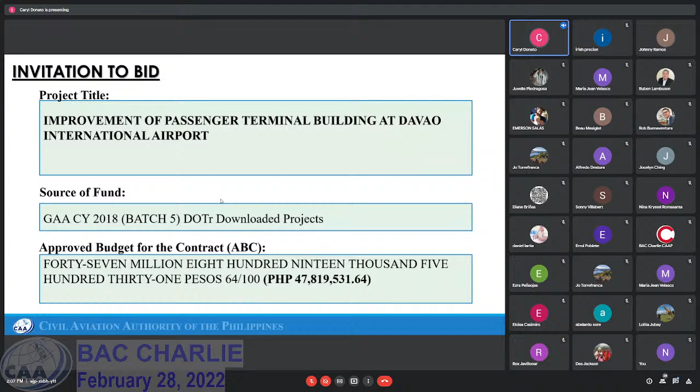For the invitation to bid, the complete title for the project is Improvement of Passenger Terminal Building at Davao International Airport, with the source of fund from the DOTR downloaded projects under GAA CY 2018 Batch 5, with the approved budget for the contract of 47,819,531 pesos and 64 centavos.

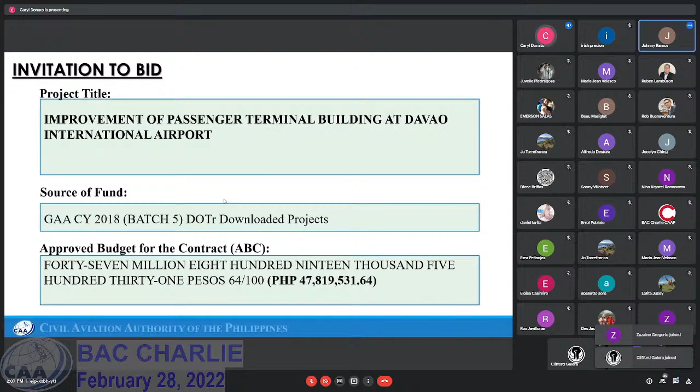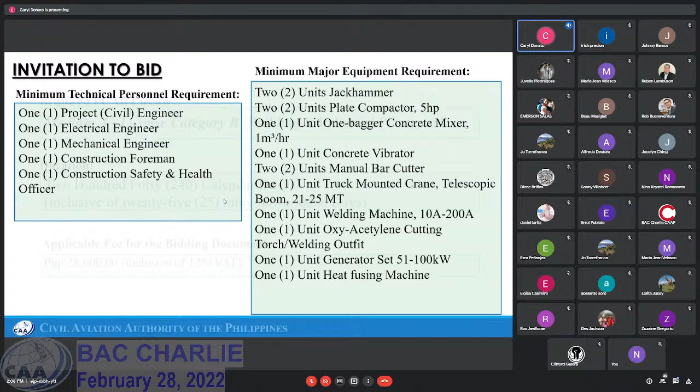Next is the required PCAB license. The prospective bidders must possess a PCAB license of medium A, license category B, for building and industrial plant, and also for the duration of the project. The project has a duration of 240 calendar days, inclusive of 25 rainy unworkable days.

And for the bidding documents, which the bidders can avail at the BAC Secretariat with the applicable fee of 28,000 pesos, inclusive of 12% VAT.

For the bid data sheet, for ITB Clause 3.0, Certificate of Site Inspection, duly signed by Engineer Rex A. Obsena, Airport Manager of Davao International Airport, or his authorized representative, is required to be submitted.

The Certificate of Site Inspection shall include the following documents as attachment: first, a copy of the company ID of the person who conducted the site inspection; a copy of the airport or facility visitor's logbook with the entry of the name and signature of the person who conducted the site inspection; and a picture of the proposed site, including the personnel who conducted the site inspection, together with the airport manager or his authorized representative. Bids not complying with the above instruction shall be disqualified.

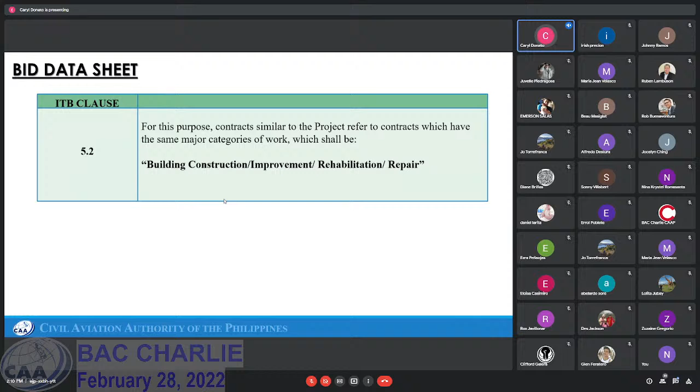For ITB clause 7.1, subcontracting is not allowed. And for 10.2, bidders shall submit all eligibility and technical documents as specified in Section 10, for the checklist of technical and financial documents. This will be discussed later on.

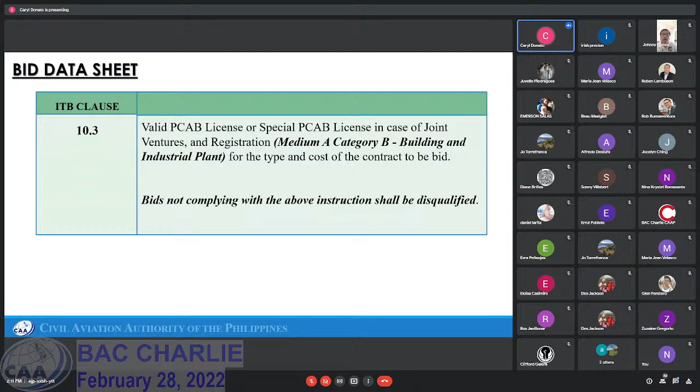And for ITB clause 10.3, valid PCAB license or special PCAB license in case of joint ventures and registration for medium A category B for building and industrial plant for the type and cost of the contract to be bid. Bids not complying with the above instructions shall be disqualified.

For ITB clause 10.4, the key personnel must meet the required minimum years of experience set below. For key personnel, we have project civil engineer, electrical engineer, mechanical engineer, construction foreman, construction safety and health officer, with a general experience of 5 years in general engineering and a relevant experience of 3 years in building construction, improvement, rehabilitation, repair, concreting of roads or other horizontal structures. Bids not complying with the above instructions shall be disqualified.

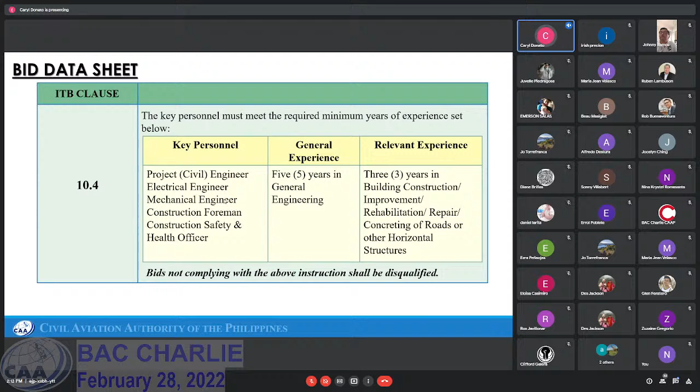For ITB Clause 10.5, the minimum major equipment requirements shown on your screen. Bids not complying with the above instruction shall be disqualified.

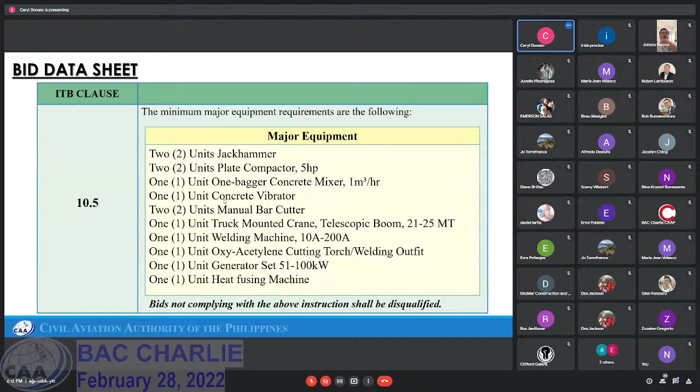For ITB Clause 11.2, bid exceeding the approved budget of the contract for the project shall be disqualified.

For ITB Clause 15.1, the bid security shall be in the form of a bid securing declaration or any of the following forms and amounts. The amount of not less than 2% of the ABC if bid security is in cash, cashier's or manager's check, bank draft, guarantee, or irrevocable letter of credit. The amount of not less than 5% of the ABC if bid security is in surety bond.

For ITB Clause 16.0, each and every page thereof shall be initialed, signed by the duly authorized representative or representatives of the bidder.

Submitted eligibility, technical and financial documents shall be properly marked with index tabs or ear tab and must be sequentially paginated in accurate order in the form, for example, page 3 of 100, page number of last page of the document per envelope basis. Pagination should be sequential based on the entire span of the whole documents inside the envelope. Bids not complying with the above instructions shall be disqualified.

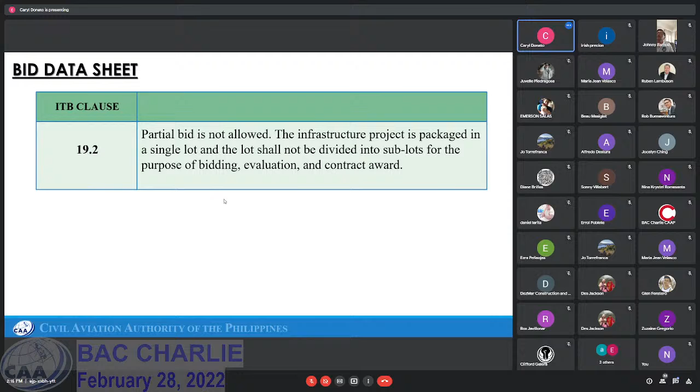For ITB Clause 19.2, partial bid is not allowed. The infrastructure project is packaged in a single lot and the lots shall not be divided in sublots for the purpose of bidding, evaluation, and contract award.

ITB Clause 21, the following relevant project documents are required to be submitted. First is the construction schedule, the bar chart and S-curve, PERT/CPM network diagram, manpower schedule, construction methods, and equipment utilization schedule. Construction safety and health programs approved by the Department of Labor and Employment for the improvement of passenger terminal building.

For the special condition of the contract under GCC Clause 7.2, in case of permanent structures such as building of types 4 and 5 as classified under the National Building Code of the Philippines and other structures, this will be of 15 years.

For GCC Clause 13, the amount of the advance payment shall not exceed 15% of the total contract price. However, as per Department of Transportation policy, procuring entity will not give advance payment to contractors.

And for GCC Clause 15.2, the amount to be withheld for failing to produce as-built drawings and or operating and maintenance manuals by the date required is 2% of the contract price.

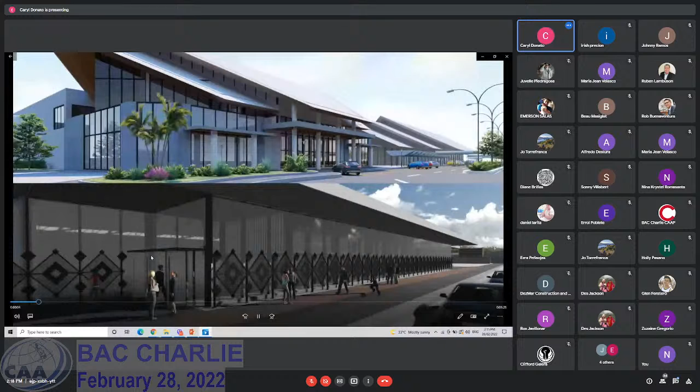Shown is the exterior perspective. The aerial perspective. The interior perspectives.

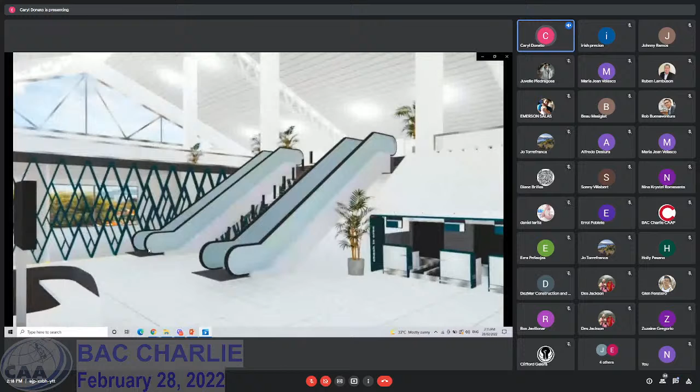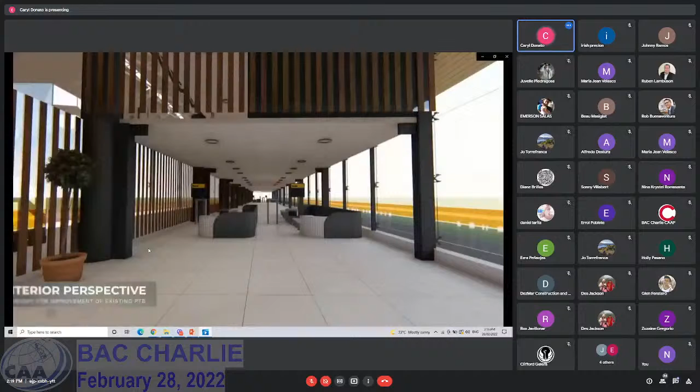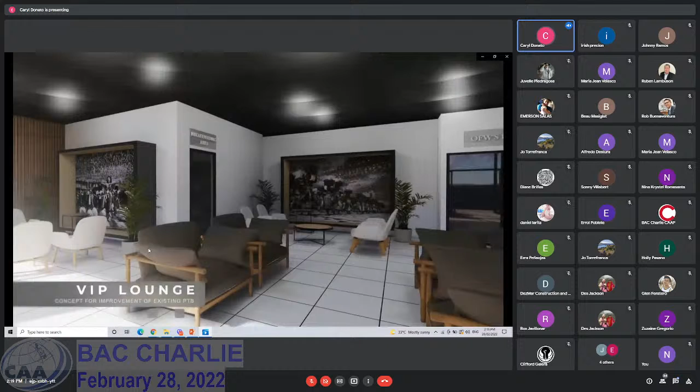The exterior perspective. The aerial perspective. The main stairs at the main lobby and the VIP lounge.

That's all for the technical details of the project. With me are the engineers and architects from the ADMS who will also provide help for the clarification later on. Next is the scope of work.

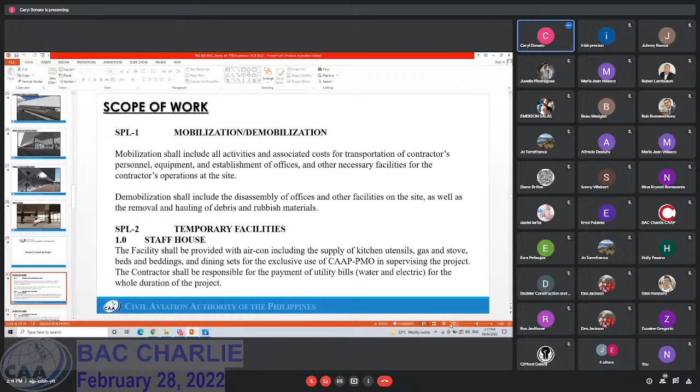For the scope of work for item SPL number 1, mobilization and demobilization. Mobilization shall include the activities for the cost of transportation of the contractor's personnel, equipment, and establishment of offices and other necessary facilities for the contractor's operations at site. For demobilization, this includes the disassembly of offices and other facilities on site, as well as the removal and hauling of debris and rubbish materials.

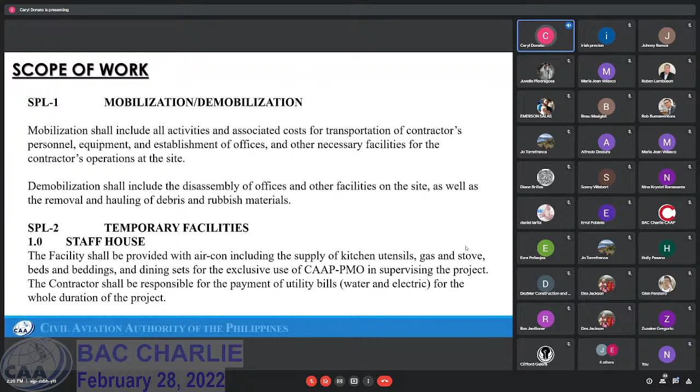For SPL number 2, temporary facilities, this includes staff house and service vehicle. For the service vehicle, this covers the provision of one service vehicle, at least 2018 MPV model service vehicle, for the exclusive use of CAAP engineers, which

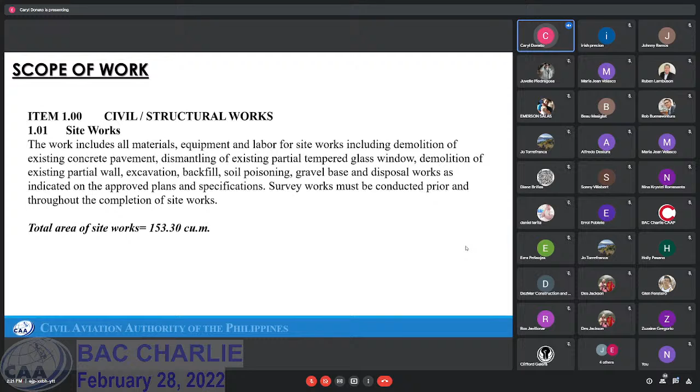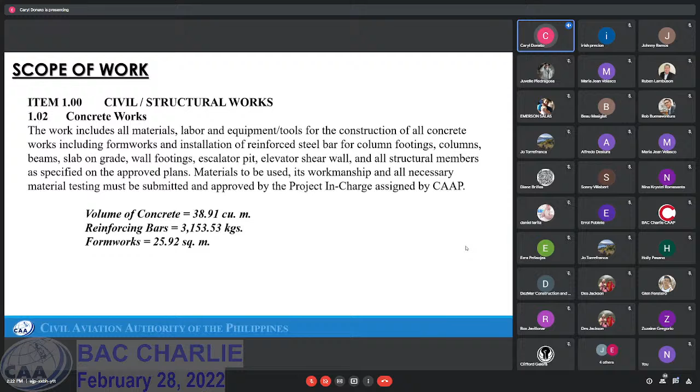Next is the concrete works. This includes the construction of concrete works, including formworks and installation of reinforced steel bar for column footings, column, beams, slab on grade, wall footing, escalator pit, elevator shear wall, and all structural members as specified on the approved plans. The volume of concrete is 38.91 cubic meter for reinforcing bars, 3,153.53 kilograms, formworks, 25.92 square meter.

Next is the steel works with a total weight of 23,477.96 kilograms.

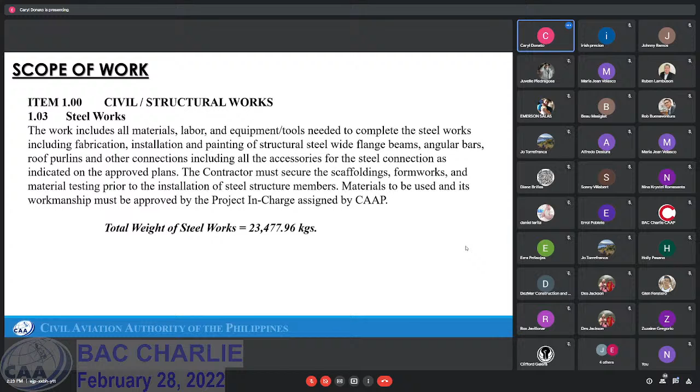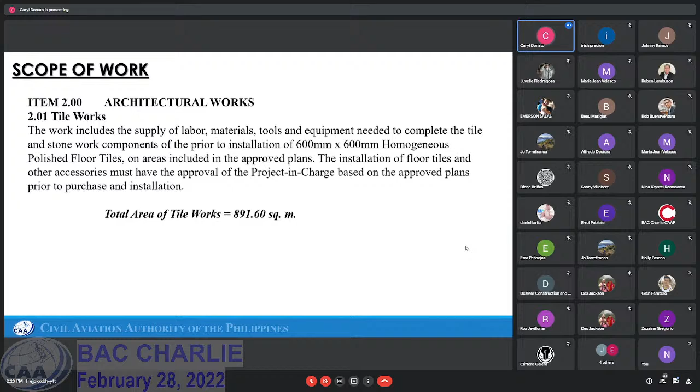For tile works, this includes the provision of tile and stonework components prior to installation of 600 millimeter by 600 millimeter polished floor tiles on areas included in the approved plans. The total area of tile works is 891.60 square meter.

Next item is the architectural works. Under this item, we have the carpentry works, which includes ceiling works. This includes the provision of ceiling works, including 600 by 600 by 0.70 mm thick stainless steel perforated panels, and also 4.5 millimeter thick fiber cement board painted finish on area included in the approved plans. The total area of ceiling works is 459.33 square meter.

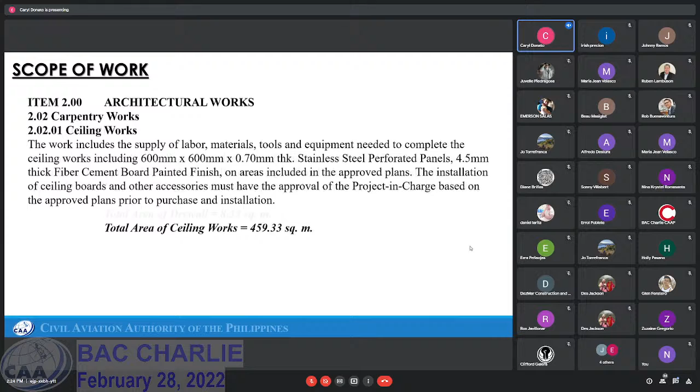Next is the drywall, which includes the 12 mm thick fiber cement board painted finish on areas included in the approved plans. The total area of drywall is 8.33 square meter.

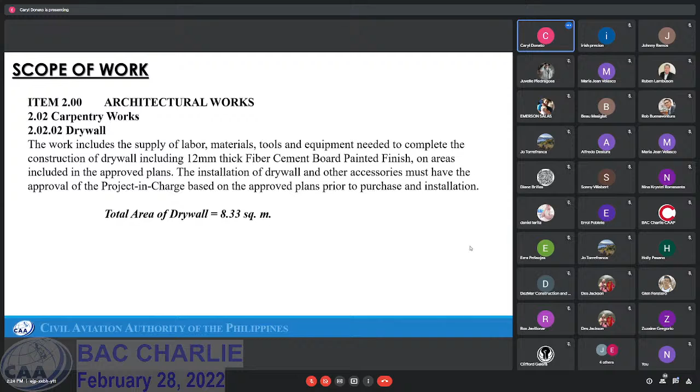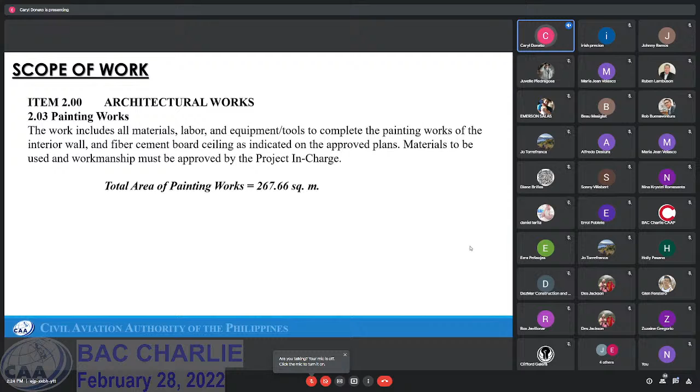Next is the painting works, with a total area of 267.66 square meter.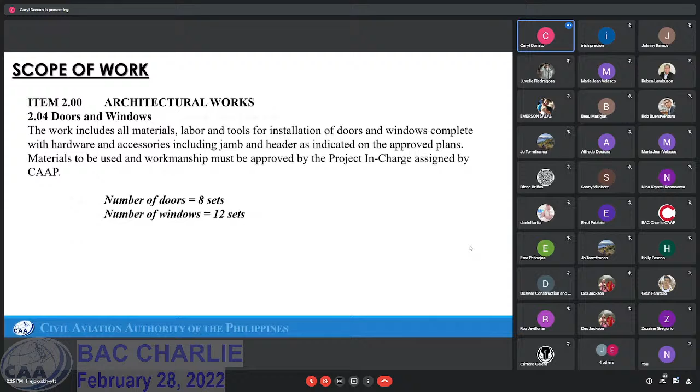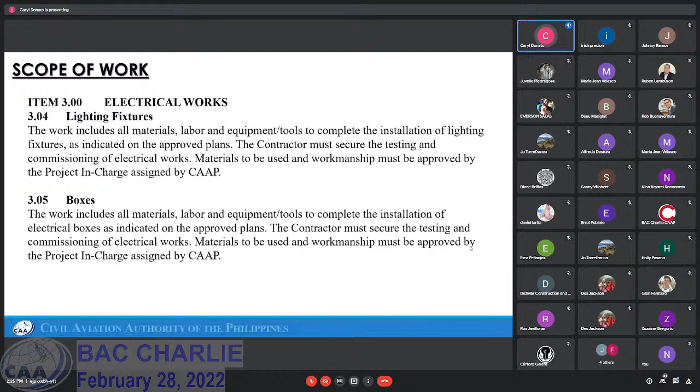For electrical works, under this item, we have the lighting and power conduits and fittings, wires, lighting fixtures, boxes, ventilation equipment.

Next is the plumbing works. Under this item, we have site works for the excavation, backfill, gravel bedding, and sand bedding of holding tanks, catch basins, pipe trenches, and other covered areas not mentioned but indicated on the approved plans.

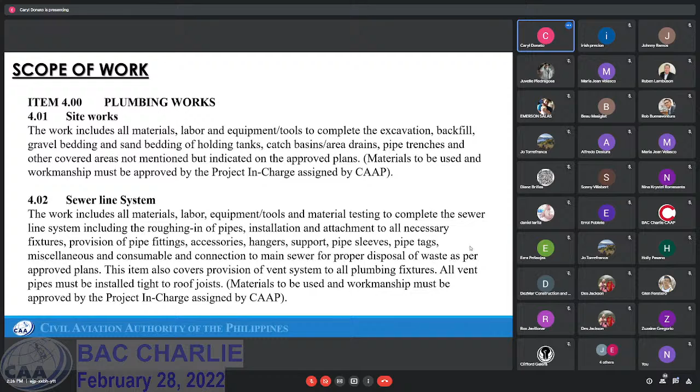Next is the sewer line system. This item includes the construction of sewer line system, including the roughing in of pipes, installation and attachment to all necessary fixtures, provision of pipe fittings, accessories, hangers, support, pipe sleeves, pipe tags, and other miscellaneous and consumable, and connection to main sewer for proper disposal of waste, as per approved plans.

Next, for plumbing works is the water line system, which includes the cold water line system, including its roughing ins of pipes, installation and attachments to all necessary fixtures, provision of pipe fittings, accessories, hangers, support, pipe sleeves, pipe tags, and other miscellaneous and consumables as per approved plans.

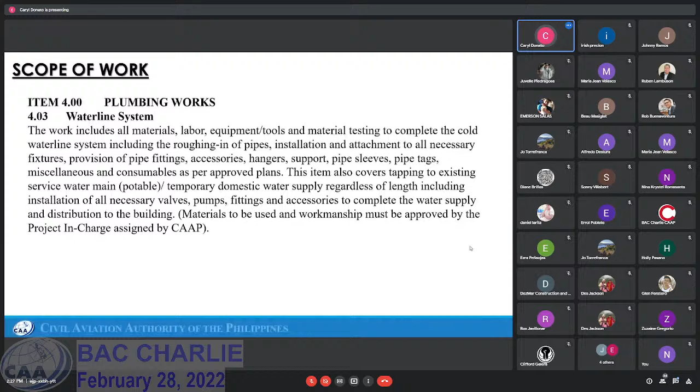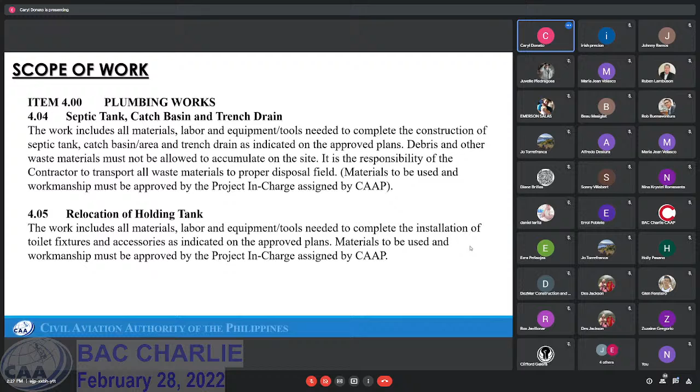Next is the provision of septic tank, catch basin, and trench drain. Next is the relocation of holding tanks.

Another item is the special equipment works. Under this item, we have the dismantling of existing special equipment. First is the existing elevator. This includes the dismantling of existing 4 units hydraulic type passenger elevator, including its controllers, hangers, supports, mechanical and electrical components, and other accessories as indicated on the approved plans.

Next is the dismantling of existing escalator, with the complete dismantling of existing 4 units escalator.

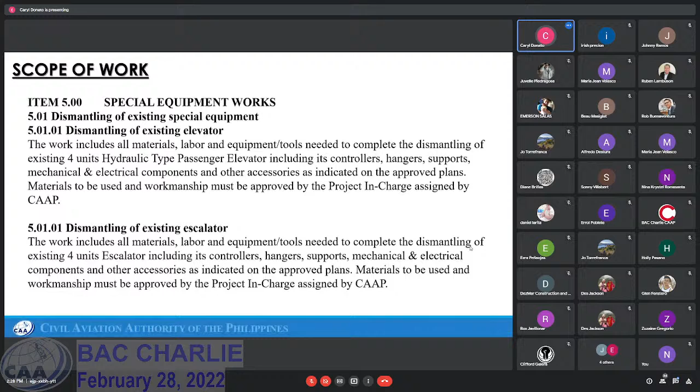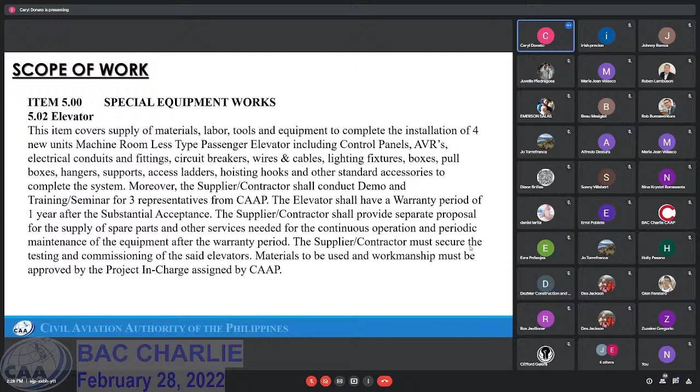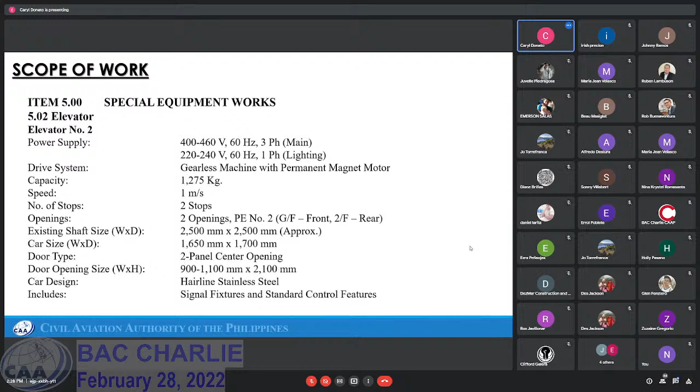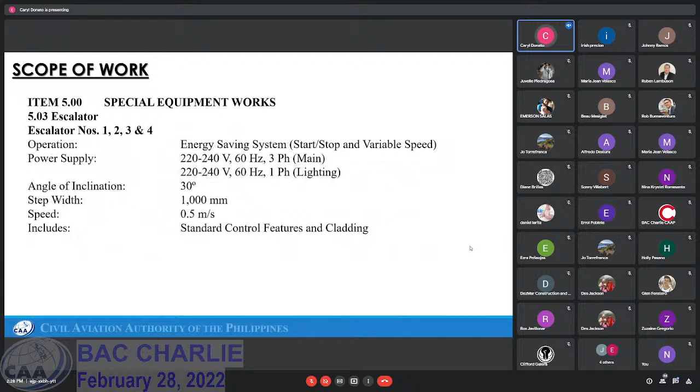Next is the special equipment works, the provision of elevator, and this shown on your screen is the specification for the elevators. And the provision of escalator. Also shown is the specification for the escalator.

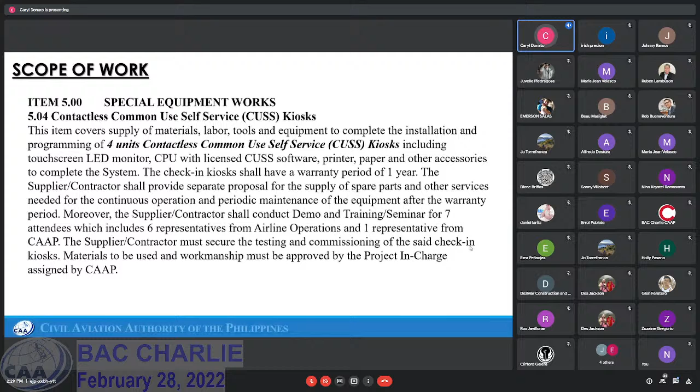Next is the provision of contactless common use self-service kiosk. This includes the installation and programming of 4 units contactless common use self-service kiosk. Shown is the specification of the kiosk.

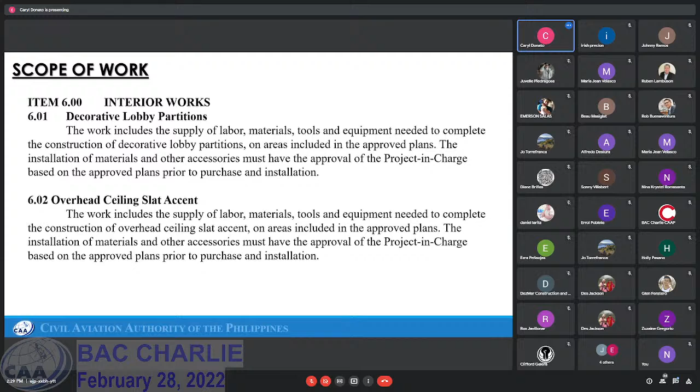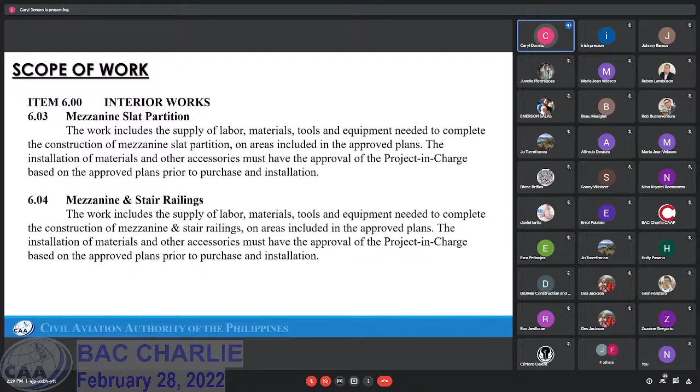Next, for the interior works, under this item, we have the decorative lobby partitions, the overhead ceiling slat accent, the mezzanine slat partition, the mezzanine and stair railings, and the powder room.

Next is the sample test cited specification pre-testing certificate.

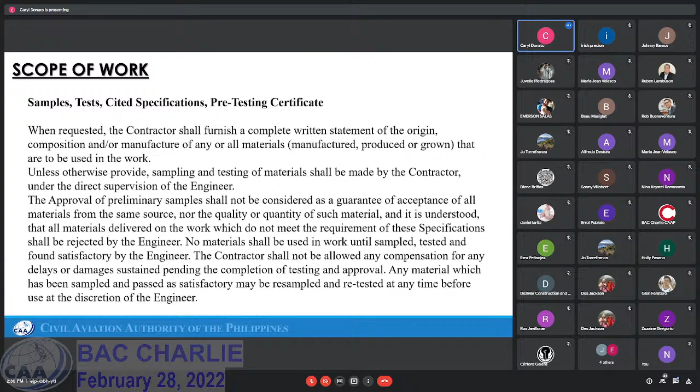All scopes of work for this item must be in accordance with the approved plans and specifications. Quality and types of materials must conform to specifications and must be approved by the project in charge of CAAP.

The contractor shall be responsible for providing personal protective equipment for staff, workers, and safety inspectors or safety engineers on site while construction is ongoing. Regular safety and weather reports should be accomplished.

The contractor shall be responsible for all laboratory, material testing, environmental compliance certificate, safety permits, and survey instruments necessary in the project implementation. All expenses shall be incorporated in the contractor's overhead cost and shall not be considered as a pay item.

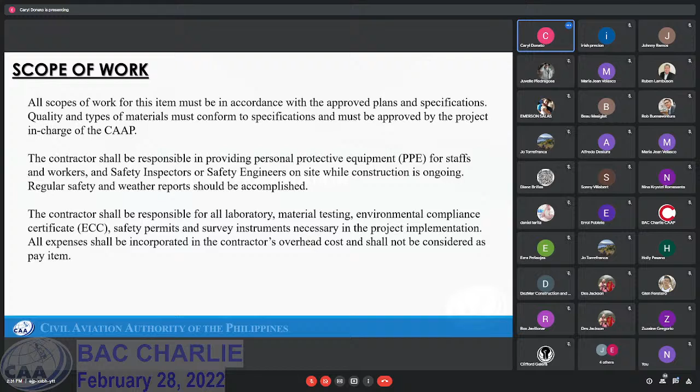That's the end of my presentation. At this juncture, the technical working group, together with the end user from the ADMS, is now ready to entertain questions and clarifications from the bidders. That's all, Mr. Chair.

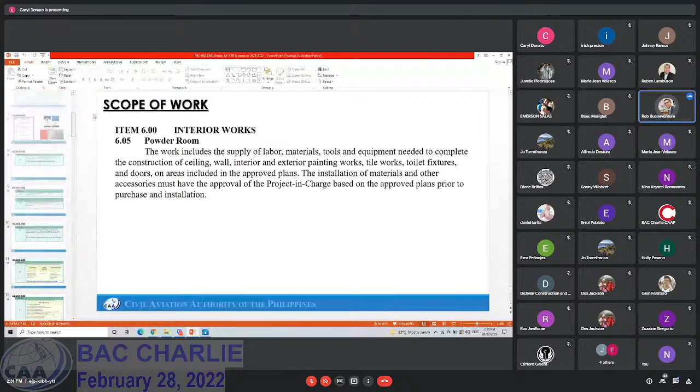Mr. Chair, yes, there's just one thing I would like to clarify from the presentation because the video that was flashed a while ago includes two different projects. I think they included the expansion of the PTB, and for this particular project, it only focuses on the improvement of the existing passenger terminal building. So I think it would be best if Engineer Donato could clarify on the matter and show the visuals only of the improvement of the existing lobby.

Yes, sir, this is the scope of the improvement of the passenger terminal building. Can I share my screen? Yes, proceed, you're still sharing your screen. Okay po.

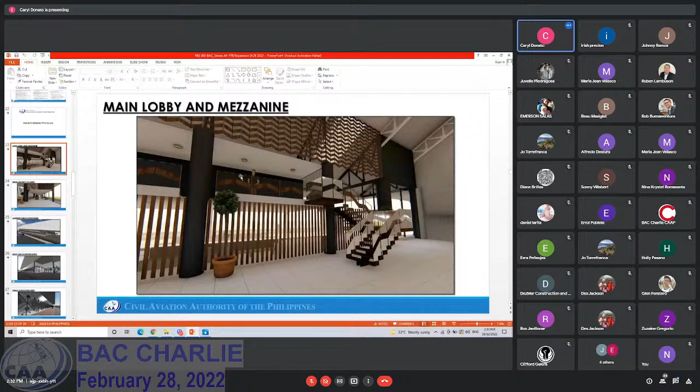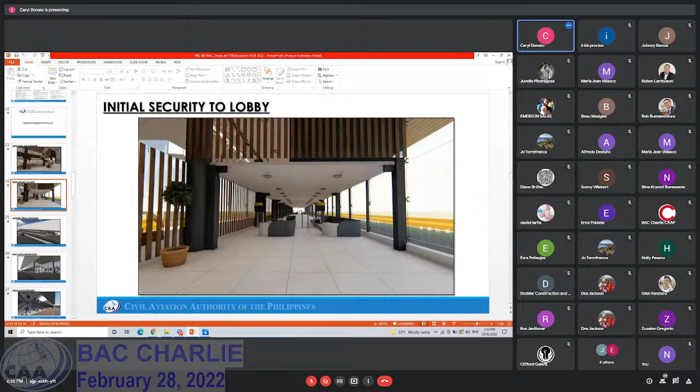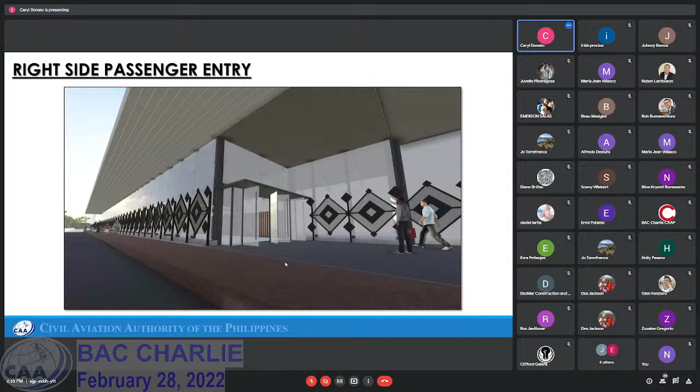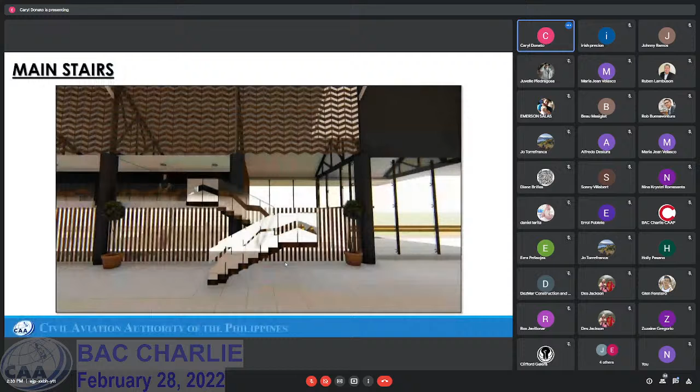Shown is the main lobby and mezzanine. Next is the initial security to lobby, and also the outside public concourse. The right side passenger entry, the public concourse area, the main stairs, and last, that's all, sir, for the scope of the project.

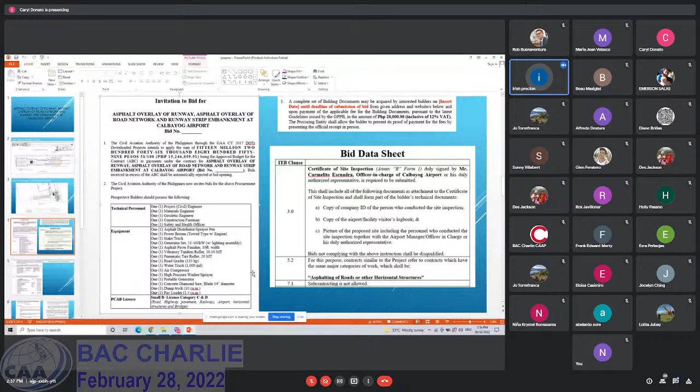Can you see my screen, sir? Yes, sir, we can see your screen. Okay. Good afternoon, all. The end user would like to present asphalt overlay of runway, asphalt overlay of road network, and runway strip embankment at Calbayog Airport.

This will be the site development plan of the project. As you can see, this is the blow-up section of number 1. This is the first scope, covering the asphalt overlay on the runway with a total width of 15 meters by 140 meter length. And then the amber colored hatch, which is the runway strip embankment, from station 300 to station 504 with a width of 7.5 meters on both sides.

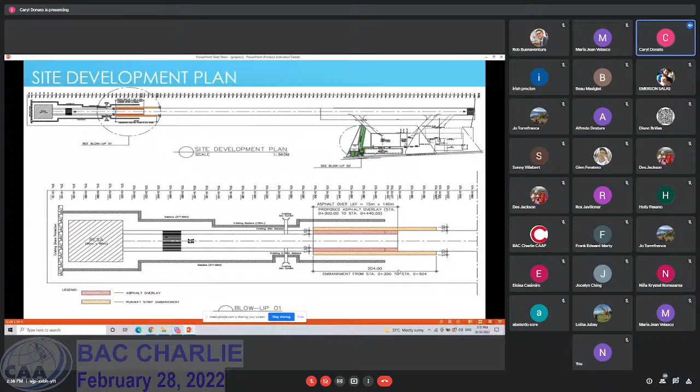Next, this is the road asphalting of our road network. Everything hatched in green color will be the coverage of our asphalt overlay, with a total of 4,390 square meters. The description is one layer of 50 mm thick asphalt pavement.

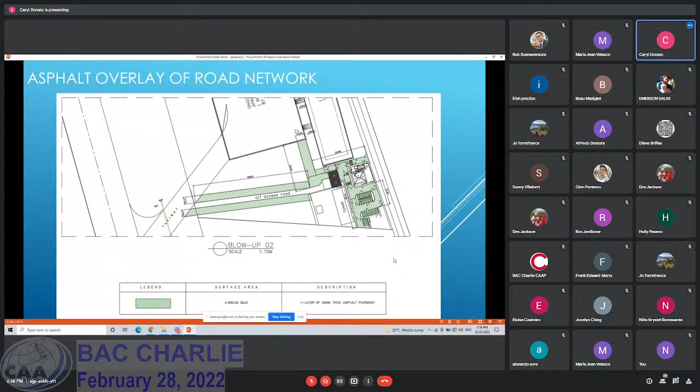Asphalt overlay of runway, then asphalt overlay of road network and runway strip embankment at Calbayog Airport, a GAA CY 2017 DOTr downloaded project with a total amount of 15,246,859 pesos and 51 centavos.

The prospective bidder should possess the following: technical personnel and equipment, also for PCAB license with a small B license, category C and D. A complete set of bidding documents will be acquired by the bidders in the amount of 28,000 pesos, inclusive of 12% VAT.

Under BDS, ITB clause number 3, certificate of site inspection duly signed by Mr. Carmelito Escuadra, the officer in charge of Calbayog Airport, or his duly authorized representative is required to be submitted. This shall include all of the following documents as attachment: copy of company ID of the person who conducted the site inspection, copy of the airport or facility visitors logbook, and picture of the proposed site, including the personnel who conducted the site inspection, together with the airport manager or officer in charge or his duly authorized representative. Bids not complying with the above instructions shall be disqualified.

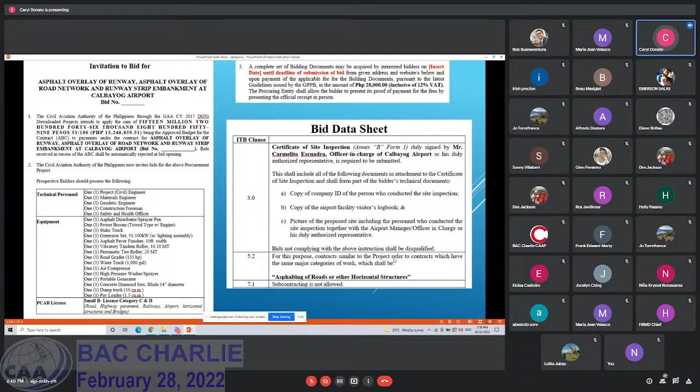For ITB clause 5.2, contracts similar to the project, asphalting of roads or other horizontal structures. Subcontracting is not allowed.

For ITB 10.3, valid PCAB license or special PCAB license in case of joint ventures, and registration, small B category C and D, horizontal works, roadways, pavement, railways, airport, horizontal structures, and bridges, for the type and cost of the contract to be bid. Bids not complying with the above instructions shall be disqualified.

Then ITB 10.4, the key personnel must have the required minimum years of experience set below. Also, the minimum major equipment requirements are the following. Again, bids not complying with the above instruction shall be disqualified.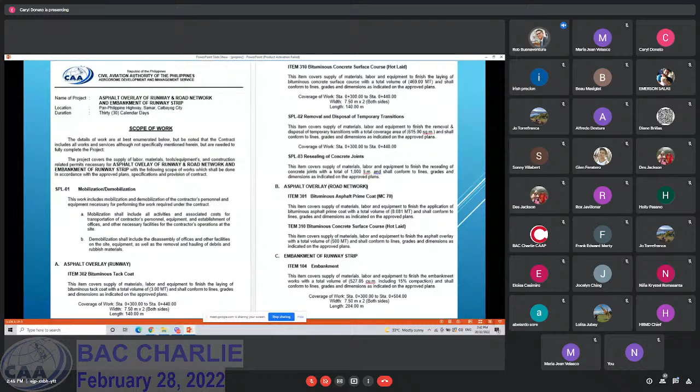Members, do you have any questions or clarifications? If there's none, maybe we can have a motion, please. The recommended action is for posting.

To the chair, I'd like to make a motion. I'd like to move to post the asphalt overlay of runway, asphalt overlay of road network, and runway strip embankment at Calbayog Airport. Do you have any second? Second, sir. There being a motion duly seconded, the recommendation is hereby adopted and the motion is carried.

This is for posting asphalt overlay runway, asphalt overlay of road network, and runway strip embankment for Calbayog Airport. User kindly coordinate the necessary documentation for posting with Sir Sonny of Secretariat. Noted, sir.

Thank you everyone for attending this afternoon's meeting. Secretary, kindly notify us of the further schedule for our meetings. We have another meeting tomorrow, sir, at 2 p.m. in the afternoon. I guess this is an opening, sir. No, this is pre-bid, Attorney Irish. Pre-bid, okay. Thank you, that's noted.